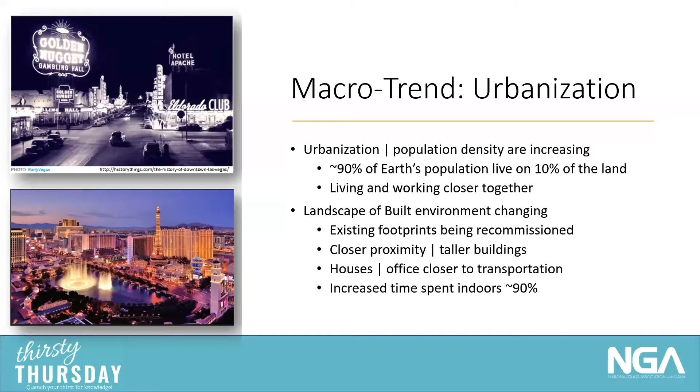And we're also spending a lot more time indoors. About 90% of our time on average is spent indoors. And because of that, we have to be concerned about the effects of noise. So the other part of it is that we see modern designs using a liberal amount of glass. And historically, that has been a weak link for noise. We have to keep that in mind as we go through this session, because we're going to come back to it at the end.

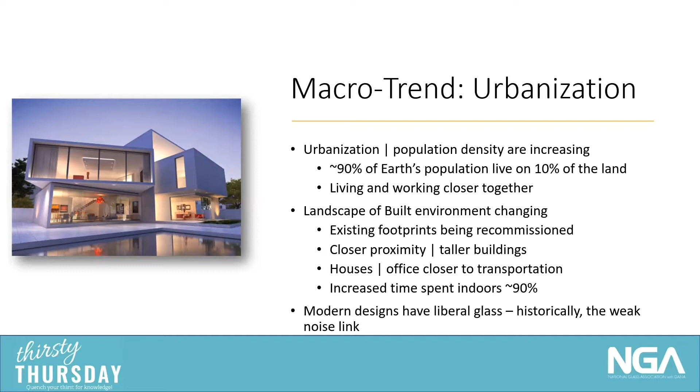So why noise? Well, the World Health Organization has designated noise as one of the top 3 pollutants in the world. It may not be seen—we might not see it on the ground littering or looking up in the sky as smog—but it's certainly there, and we can hear it. And it does disturb many facets of our life in the way of communication, comfort, and concentration.

Concentration is a big one because that has an impact on safety, job performance, and more importantly, on our individual health. The other key is the sources of noise are increasing.

And there's been proven in many documents—all you have to do is Google it—that noise has a very direct implication on students' capability to learn. And during the COVID pandemic, anybody who has had children trying to learn at home, nephews, nieces, grandkids, or even trying to work at home with different noises, you'll understand how hard that is.

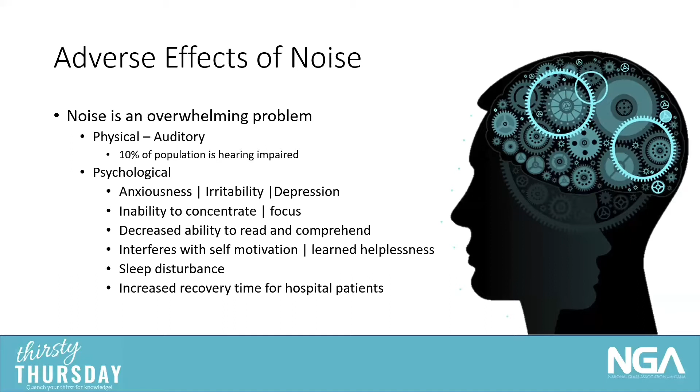So when we look at our design dilemma and we look at noise, we know that we need buildings. It's a human need to have shelter, any kind of shelter. So that is a need that we all have.

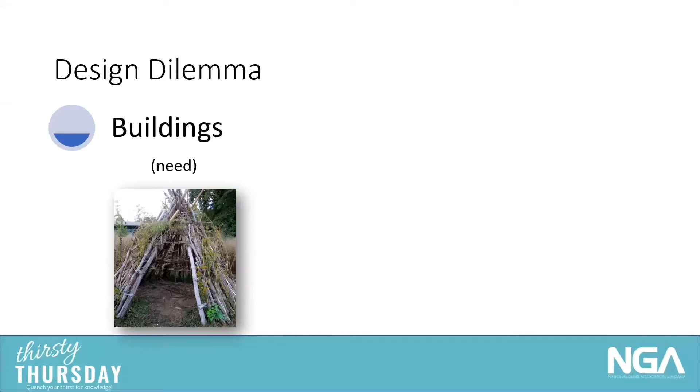We want a lot of daylight. We like to connect with the natural side of things. And all of this gets into the liberal use of glass and the willingness for us to use glass to bring natural daylighting inside for not only energy, but also for the psychological reasons.

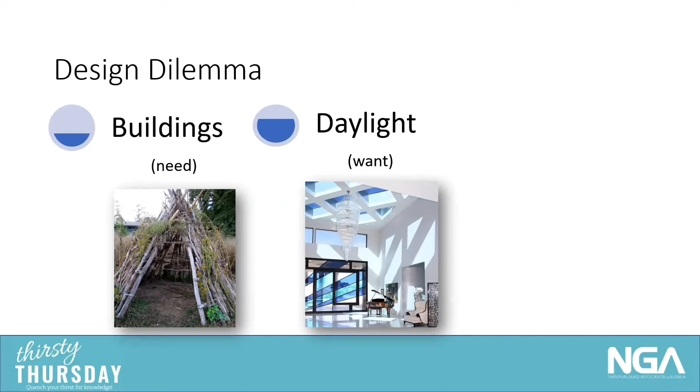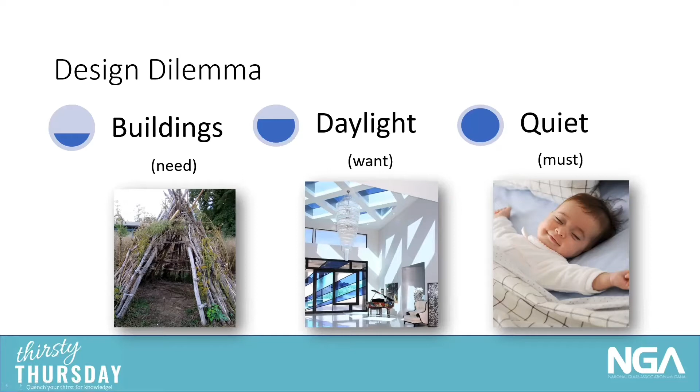But what we absolutely need is quiet. We must have some quiet for us to sleep, to turn down, to turn off, and to rejuvenate, and in some cases recharge our batteries. And so we have to find ways to combine all of this so that we can function at our highest levels. And so that's when we come to sound abatement glazing.

In the sound abatement glazing, we see that the specifications are tremendously increasing. It is driven by choice or municipal mandate. So you don't really see a noise abatement standard written in hard text in a building code.

Now, cities and other municipalities may have noise regulations, and there isn't a state in the continental United States that doesn't have some location within it that doesn't have sound control requirements. So it really is growing.

There are noise requirements in some of the health, safety, and wellness regulations. So in LEED, you can get points in well building design and things like that—they do give noise abatement points and credits.

You also have to look at the building type, the location, and the use. If it is a greenhouse that's in the middle of nowhere and it has very low occupancy, it probably doesn't have a need to have acoustical comfort inside. Although, I've not done a study to see if the plants really would grow better and produce more with certain types of noise or lower level of noise.

But the building type, the location, and the use of the building is very critical. The other key is you cannot move the building. So once the building is up, what gets built around it is secondary. And a lot of times you'll figure, oh, it's a pretty quiet area, we're okay, we don't need noise control. And think of that on a housing, a residential side, and also on a growing city.

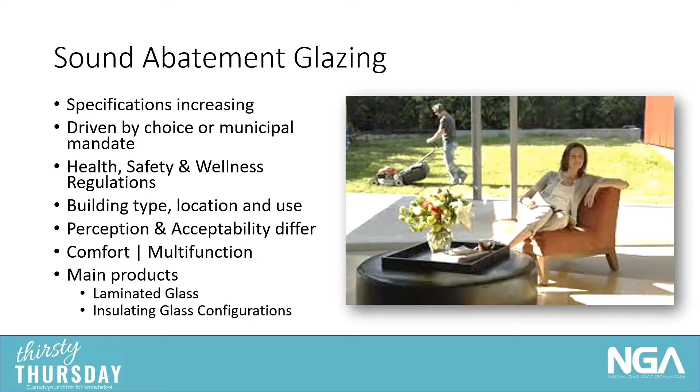The main products in sound abatement are laminated glass and insulating glass configurations. Those are the two things typically used. That doesn't mean they're the only options, but those are what we'll concentrate on here because they are the most widely used materials.

So let's get into the basics of acoustics, and I promise this won't be a physics lesson. But we do have to get into a little of this. What is sound? Sound is molecules in motion, a mechanical wave. It has to go through a medium for transmission, and that medium in most cases is air, water, or a solid object. For us talking about acoustics, it's mostly solid objects and air. You could put this in an aquarium and change those dynamics, but we're mostly talking about solid objects, which is the glass, and air.

We measure sound level by pressure, and that pressure is called a decibel, designated as a small d and a capital B. You'll sometimes see that as dBA, with a capital A at the end, meaning it is weighted for human hearing. dB and dBA, as confusing as it may be, are used very interchangeably in our industry, but note there is definitely a difference between the two.

Any vibrating object will generate an acoustic wave, and that wave will propagate through the medium, be it the air or a solid. That's how we hear. Those frequencies come through, called hertz. They vibrate our eardrum and move the little hairs in our ear, and that's how we hear.

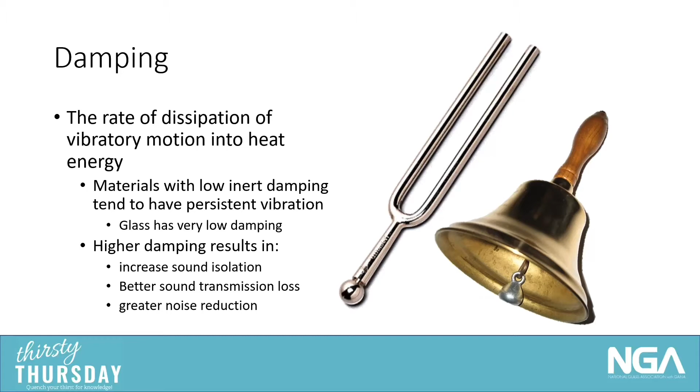So what I'd like to do now is go through the methods of test. We have these principles, but how do we test glass, or test materials, to understand the acoustic performance of them? The first thing is a product evaluation. Most construction products can be tested for acoustical performance, they just need to use a standard practice, and there are several different standard practices out there. The first one written down and documented for international use came from ASTM. It's still around today, it's ASTM E90, and we'll talk a little more about how that's done.

Typically glass and glazing is evaluated by the same method, using sensors and sound generators and everything else. You can test the glazing alone, or you can test it in a system, and you'll get two different results depending on how you test it. It's like anything else: if you're testing a component and put it together in a system, you have to make sure the whole system works together. The component can bring a lot of very natural and nice characteristics to it, however, you're always going to be governed by the weakest part of that system.

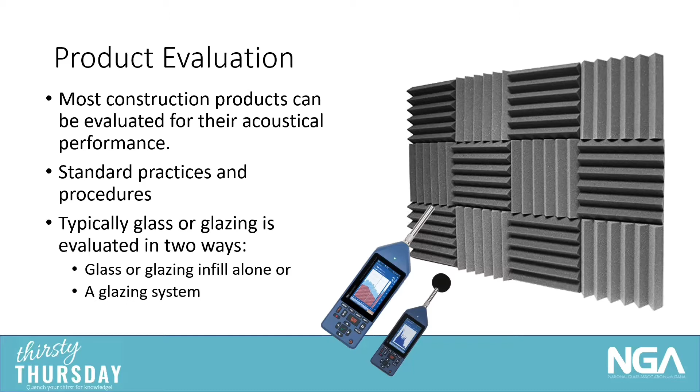So the testing itself is done in a very simple to understand way. You have a receiving room and a source room, and in the middle is where you put your sample. You start generating noise on one side and measure the sound pressure levels at the frequencies as it goes through the material you're testing. In this case it looks like a piece of glass, but it could be a window system, a car door, a concrete wall, whatever. It goes from the source room, and you measure how much sound doesn't get through that opening with your sample in it, in the receiving room. That is called the sound transmission loss number.

The methods you use, there are two different methods that use this same dual room with a demising wall structure. One is ASTM E90, which was created around the early 1960s. It's been the standard test method for laboratory measurement of airborne sound since then.

Not too long ago, ISO came out with their test method, ISO 10140, which uses the same principles but does have a few differences in that they fix their sizes to a very specific size, and they don't account for spikes and dips the same way E90 does in the calculation. But overall, the method of test is the same.

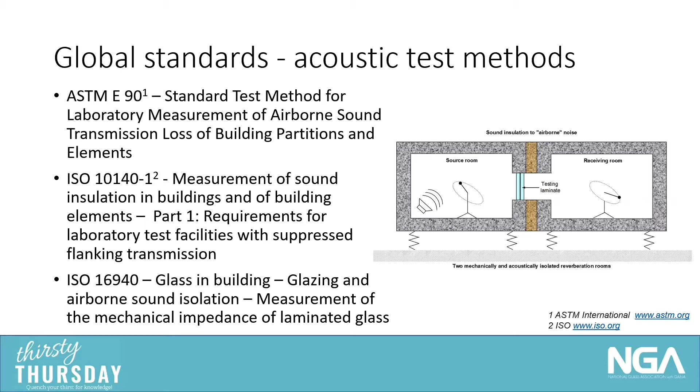There is one other test used for glazing measurement, and this is a mechanical impedance test. It is specific for laminated glass. It's done on a very small sample, and it just characterizes the components, the glass and the interlayer. But it is an important test to remember.

So it does encompass the peak human hearing. It typically runs from 80 hertz to 5000 hertz when you do the test. There are some labs that have the capability of running lower and some that run higher, but typically you don't see data much higher than 5000 to 8000 hertz from this.

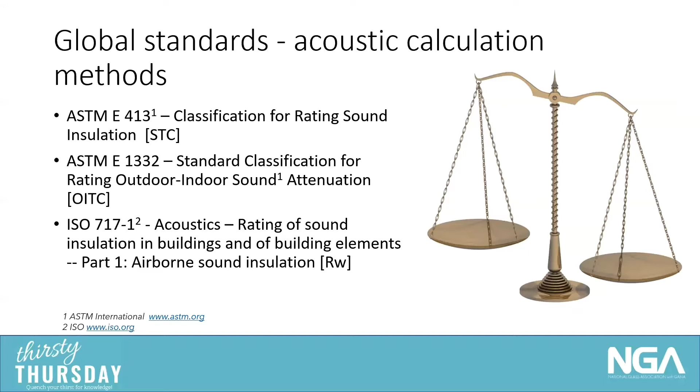Of course, the ISO system, with their test method, also has their own rating system, ISO 717. This gives you a weighted sound reduction number, abbreviated as RW. For most instances, again, they're using that same curve, just applying their rules a little bit differently. On the next slide, I'll give a bit more explanation of what happens there.

So for sound transmission loss, it is a contour fit. This is shown manually, but obviously it's done by computation. The teal or green line you can see is very rigid; that is the contour, and that shape stays fixed, it does not change at all. What you do is move that contour up and down on the graph to get the best fit for your sound transmission loss.

Maybe you can see the pointer. What you're looking at is the change in difference between this rigid line and your sound transmission loss contour line.

Once you get a fit that meets the rules - and the rules are, you can't have any points below that teal contour line that are greater than 8 decibels. So you can't fall too far below that line without a flag going up saying stop, you can't do the calculation anymore. Those bars at the bottom and that black line help show that 8 decibel rule. If those black bars tend to go up or over that horizontal bar, you know you do not have a good fit. All of those column bars have to be below the 8 decibel level.

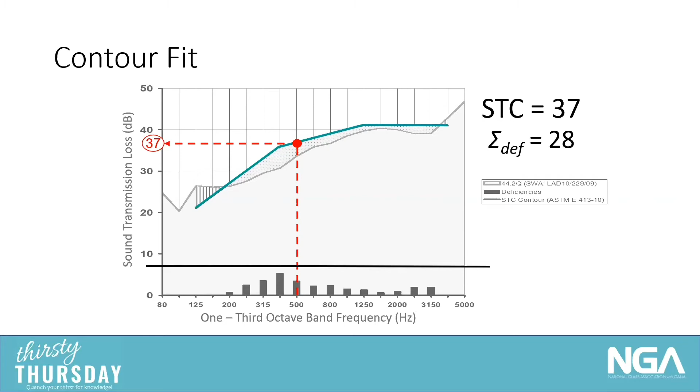The outdoor indoor transmission class, abbreviated OITC, uses the reported one-third octave band frequencies between 80 hertz and 4,000 hertz. It's used for outdoor and indoor noise rating, mostly traffic. It's not intended for environmental noises such as speech or higher frequency sounds.

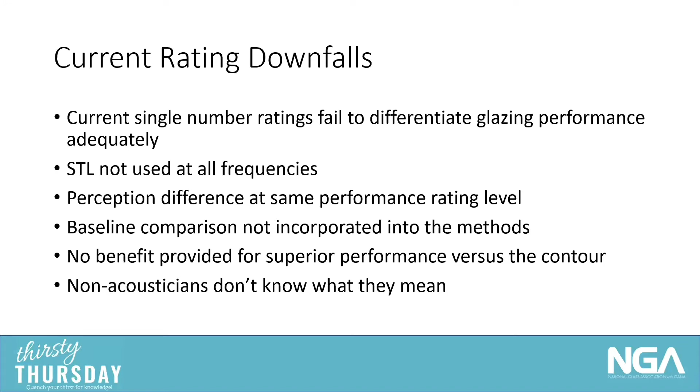There are some things that can be done to help spread knowledge and get that better understood, but it is a fairly complex mechanism.

So leaving the test methods, the key I want you to take away from that is: two rooms, stick something in the middle, blast it on one side and see how quiet it is on the other side. That's how you get your values.

But then let's go into what you can do with glass design. There are levers that you can use to get sound reduction. Glass mass is the biggest one.

So you can go to thicker glass. Thinner glass has higher sound transmission than thicker glass does. The key to remember is that the critical frequency, that frequency where the sound goes through easily, moves lower with thicker glass, not higher.

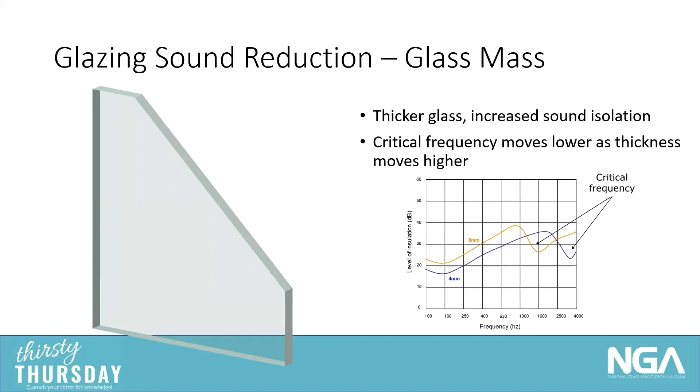So the thicker the glass, the critical frequency tends to move to the lower hertz regions. So if you're trying to block out noise happening at 1600 hertz, you don't want to use 8mm glass because that's right where the critical frequency is. You're better off using 4mm glass because you actually have more performance there. Those are some of the critical things you need to think about when using those types of glasses.

The other lever is the gap. We can change the gap. It's most effective in insulating units with a 1/2 inch or 12mm airspace or greater.

You do get to a point where the airspace is so great that you have to do other things in design if you're going over a few inches. But for the most part, somewhere between a 1/2 inch and an inch is very, very effective.

The overall single number rating is rarely enhanced with gas infill. We get this question all the time—if I put argon in there, or krypton, is it going to change my overall rating? And the answer is no. The reason is you gain some at certain frequencies and lose some at other frequencies, but the overall rating ends up not changing.

So this is another one of those instances where, if you are very specific about what you need, you would have to run a test with the amount of gas infill you need. But overall, the single number rating doesn't change when you go from air to argon to krypton. There are some gases that do make a difference, but they are very rarely used.

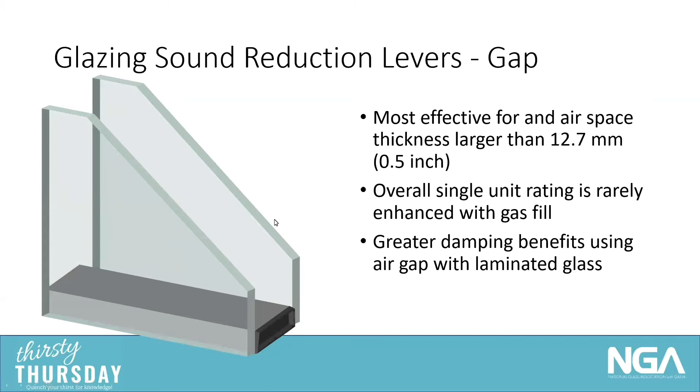And then you get greater damping benefits when you combine air gap with laminated glass. Obviously you keep making the glass thicker. And then you have our last lever, which is the interlayer.

What the interlayer does is allow for damping. It can be used in combination with airspace, thicker glass, double laminated—all of those types of things. It contributes to the system by giving you that hand on the tuning fork, or grabbing the bell, and just damping that sound so it doesn't come through at the same intensity. That's what the interlayers do.

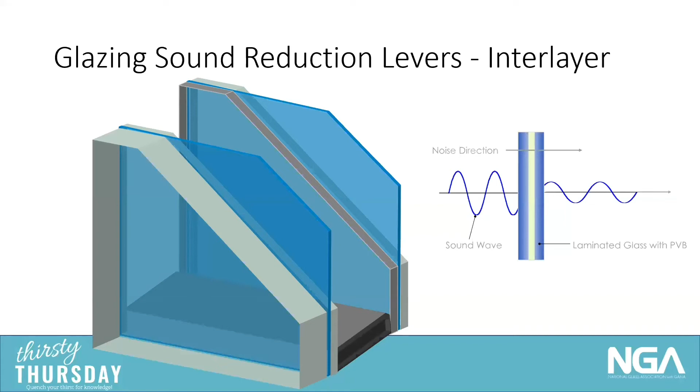The most typical configurations for laminated glass in acoustics: you can start with a single unit laminated glass, which is two or more pieces of glass with an interlayer in between. You can go up to a laminated insulating unit, a double laminated insulating unit, triple—where one or all three constructions of the glass layers is laminated—and even into multi-ply laminated for high-end security or other controls. Those are the typical laminated glass configurations utilized for acoustics.

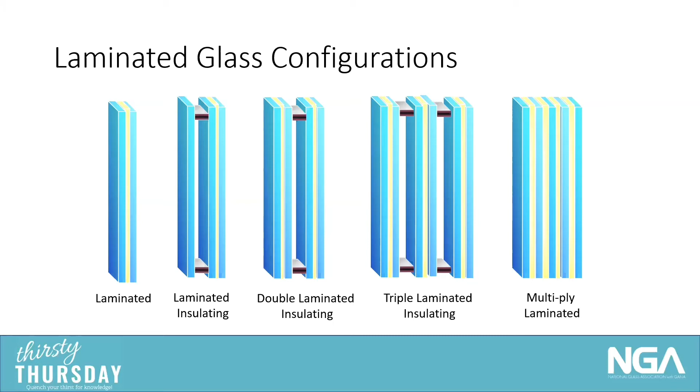The interlayers themselves have undergone an incredible evolution since we first started testing for acoustics in the early 1960s. I liken it to the telephone. We went from the old rotary phone, which was conventional PVB. It worked really well, you could accomplish what you needed to do. It still works well today—if you find one of these old phones and plug it in, you can still make phone calls. You might not be able to dial out, but you can certainly accept calls.

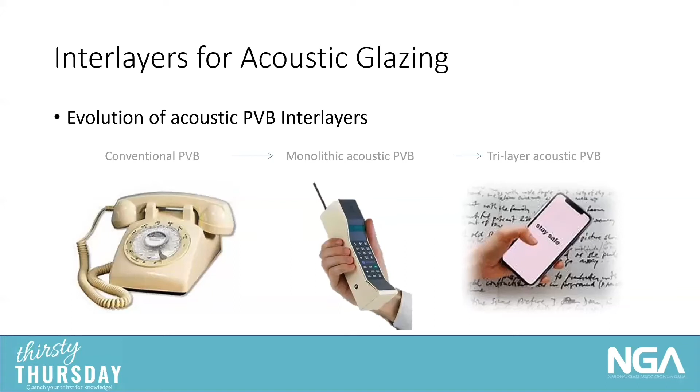Then it moved to a more engineered product, a monolithic acoustic PVB, engineered to have greater sound damping. I call that one of the earlier cell phones, the big clunky thing. It had some issues from a processing standpoint, a little more difficult and not all that production friendly. Then came the big evolution to tri-layer acoustic PVB interlayers, or multi-component interlayers—what we'd call our cell phones today, really highly engineered, highly functional, and refined.

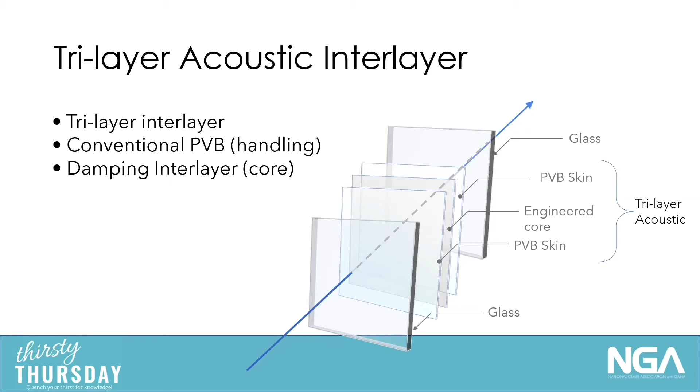So what are these tri-layer acoustic interlayers? They tend to still have two pieces of glass, with differing materials in between. In the case of the one we make, it's PVB skins—your conventional PVB skin—with a highly engineered acoustic damping core. Most people don't know that your standard 30 thousandths or .030 PVB is the thickness of a credit card, and this material is made in that same thickness—not thicker, actually the same thickness. The core is the damping material, and it creates a much more efficient sound damping characteristic.

You can see that by looking at the evolution of interlayers in sound transmission loss numbers. The bottom black curve is 6mm monolithic glass, with our critical frequency right around 2500 hertz. Then if you look at conventional PVB interlayer, that's the bright green one—we had some advancement with the monolithic PVB interlayer. But the tri-layer PVB material really did take care of that critical frequency dip, got rid of it completely, and really brought up the amount of performance.

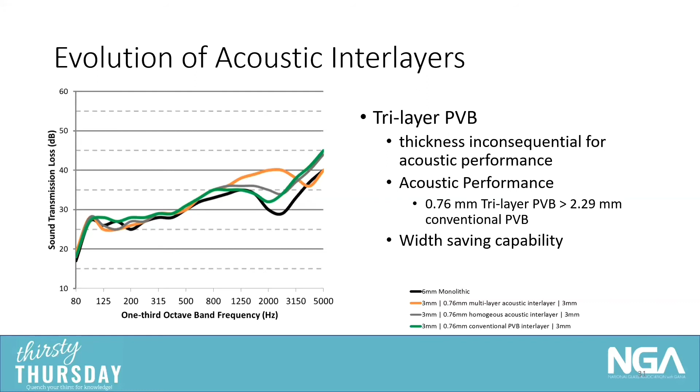A couple things to remember: a change in frequency, in a critical frequency or any frequency, of 3 decibel units is barely perceptible to the human ear. A change of 5 decibel units—from one solid line up to the dashed line—is very perceptible, a noticeable change. A change of 10 decibel units or more is actually a halving or doubling of the sound, depending on direction. So in this case, the tri-layer acoustic interlayers can cut the sound by about 50%, or cut it in half, in the critical frequency range. That's pretty good performance.

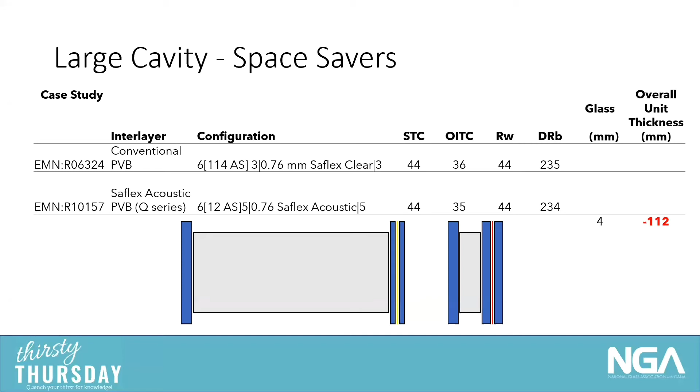What does that mean? Who cares, right? It allows you to design systems in a much thinner overall capacity and get incredible acoustical performance out of it. We looked for an STC—both units have an STC of 44, and we tried to find the closest OITC within that unit, within 1 unit. You can see that the material using conventional PVB, the overall thickness is quite wide. By going to the acoustic interlayer, we actually save 112 millimeters of space, just by slight tweaking of the glass and using the acoustic interlayer. So you really can make much thinner units with the same acoustic performance—they are real space savers.

Laminated glass for acoustic control is an incredible trend we're seeing. It's been used in windows since the 1960s. Most interlayers tend to have a high inherent damping capability—some are better than others, some are engineered to be superior, others just have a natural capability. Laminates add flexibility to tweak performance. One of the beautiful things on the acoustical side is we have the ability to change glass thicknesses, change air gaps, change symmetry or asymmetry—all of that can be tweaked to give different performance attributes.

Remember that the critical frequency, the transmission loss, is dominated by the amount of damping. So if you have a big dip right there, you can put damping in to help alleviate that critical frequency. You can increase your overall performance without going to thicker glass and thicker units by putting laminated glass in there for acoustical control, and you can have even higher performance with the tri-layer materials.

One of the things we tell people is that it's a polymer, and all polymers tend to be sensitive to temperature. Typically, and we recommend this for any type of laminated glass, the laminated glass should be toward the interior for the most consistent performance, because it can vary a little bit by temperature.

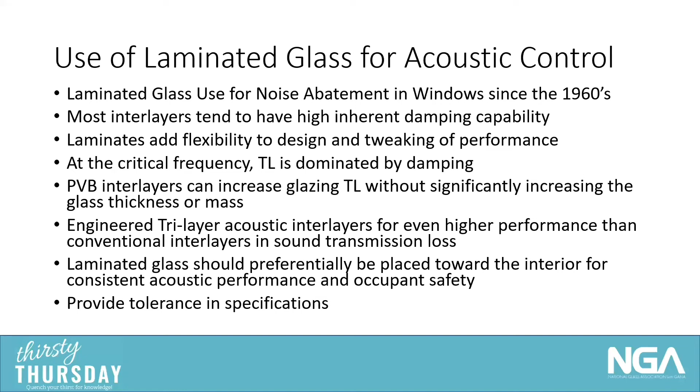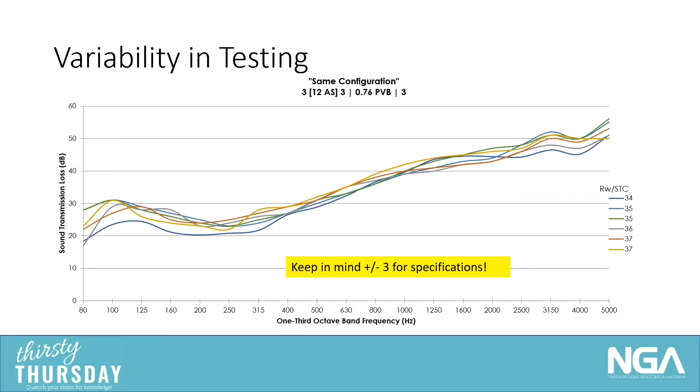What are some design considerations for glazing? What influences acoustics and what doesn't? Adequate damping and airspace of a 1/2 inch or more is recommended. Laminated glass with non-rigid interlayers. Rigid interlayers, if used by themselves, are not very good for acoustics. They are very similar to monolithic glass versus some of the conventional or acoustically engineered materials. Thick glass should be used if you need very low frequency reduction, but remember our critical frequency also travels down, so you want to pay attention to that.

Using asymmetrical insulating glass constructions is better - symmetrical insulating glass constructions tend to be poorer in performance than some other constructions because the vibration is at the same frequency. Acoustic tri-layer interlayers give you some of the best performance versus monolithic materials. The temperature of the glazing can have an effect, and certainly the framing type.

Now, to this point, we haven't really talked about the framing type, but I'll give you a little tidbit and rule of thumb: if air can get through, well then sound can get through. So the frame type, the air tightness of the frame, and all of that have a big influence. Obviously, fixed windows will perform better than typically operational windows.

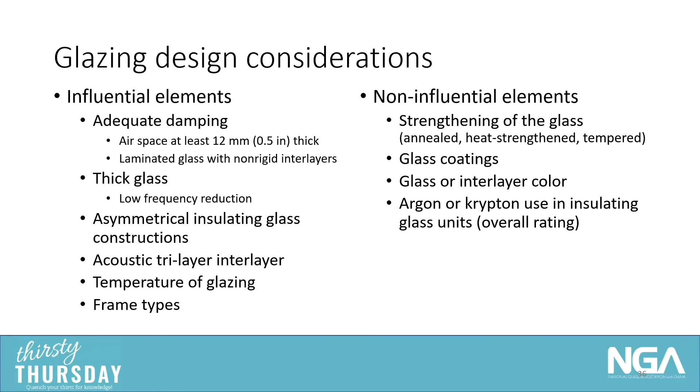Some factors in design: again, concern yourself with the use of the building. If it is going to be a school that's being built right next to a train track, you might want to have acoustical glazing in the school. If it is a greenhouse in the middle of a field that doesn't have anybody going in it except once or twice a day, you may not need it. A hotel sitting right on a highway, yes, those types of things.

Understand the type and origin of the noise. That is very critical. If you have low rumbling noise, you're going to want to concentrate on a higher OITC number and look at where your frequency is coming from. If you have higher pitch noise, you're going to want to look more at stuff above 1,000 hertz and what's going on there. Also, how frequent your noise is, because you could have a lot of noise when there's nobody in the building and it be quiet during the day.

Your windows and your glass cannot make up for poor wall construction. So if the sound is stopped going through the windows but comes right through the wall, your occupant will not be very happy. There's not much we can do about it, but those products should be closely matched in order to get the optimum performance out of them.

Again, the type of window or system, fixed versus operable, makes a big difference. The window dimensions - again, very large windows and very small windows - we have to concern ourselves with edge effects and vibration and damping. In some cases, very large windows can give you more of a whoomp, whoomp, whoomp sound if they get moving and vibrating, where little windows can sometimes give you a hissing sound because they're so stiff and the air is like whistling through.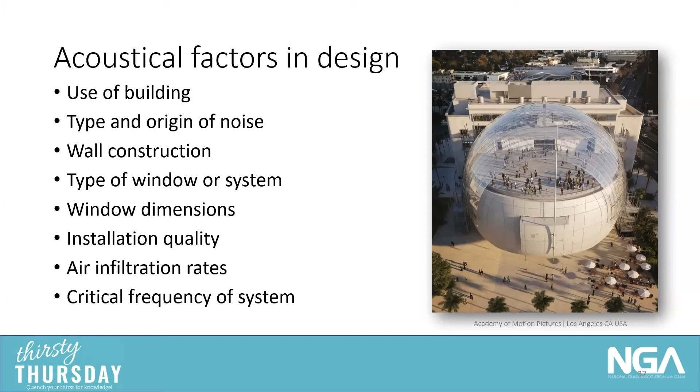Installation quality matters because if air can get through, sound can get through, so we look at air infiltration rates and the critical frequency of the entire system. You can't rely on just one component. You can't take a poor frame and put high performing glass in and expect it to perform any better than that poor frame, and vice versa. You can't take a super engineered acoustically sound frame and put in low rated glass and expect that frame to make the difference. It's going to go to the lowest common denominator.

Some school systems and educational facilities use it to help with learning and the environment, bringing in daylighting, the natural aspects, the liberal use of glass, and the multifunctionality of incorporating color with natural daylight.

Some hotels and spas look for natural beauty, serenity, and exotic looks where you can incorporate color, but you want to make sure you have the sound and comfort there too.

Hospitals use it in many different aspects, from the facades to interior applications like divider walls, for health and cleanliness. Glass, as we all know, is very easy to clean.

All of that incorporates the use of acoustic glazing, especially with HIPAA laws and similar regulations. Transferring sound from one room to another, or from outside to inside, is critically important.

Offices, as we discussed, deal with production, concentration, and focus, so offices are incorporating laminated glass in their facades and interior partitions for sound comfort, while also bringing daylighting further into the building.

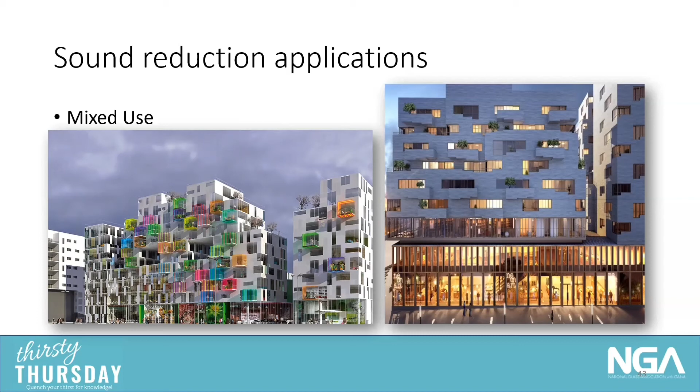Those are applications, and then there's mixed use. A lot of times you have materials where you have stores below and residences above, and that's a time-of-day type thing. It might be very loud during the day, and in some cases louder at night, while people are trying to live and run their lives on the upper floors. So those are also applications for acoustic glazing.

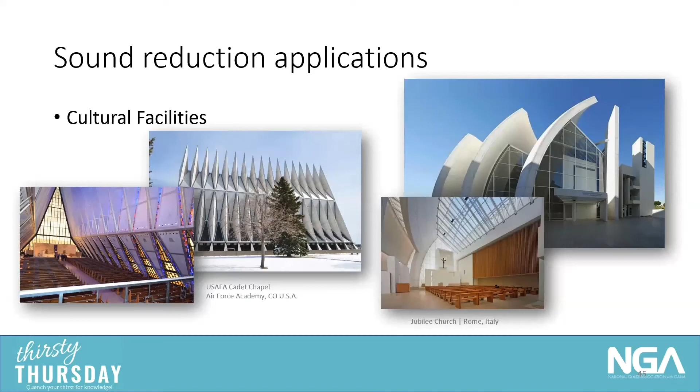Museums tend to be quiet and serene, and they want you to focus on the art they're displaying, not be distracted by outside noise or a poker run with motorcycles going by. That's an application, along with cultural facilities, where thought, prayer, concentration, and relaxation are also very critical.

We also see sound reduction applications in government buildings, which have multifunctional needs for wayfinding and security. Incorporating laminated glass for acoustics is a natural fit for things like that.

Sports arenas too, the facade and the VIP boxes, which I've never understood—if you're going to a sporting event, maybe I'm just jealous, but you don't want to hear what's going on outside. So I'm confused about that one, but we do see a lot of those VIP booths glazed with acoustic glazing. I'm often told the reason is those booths are used for non-sporting events, other meetings and things like that. Obviously, I understand why they put that in.

Concert halls too. Nobody wants to go to a concert hall, especially an opera or a show, and be distracted by outside noise and what's going on.

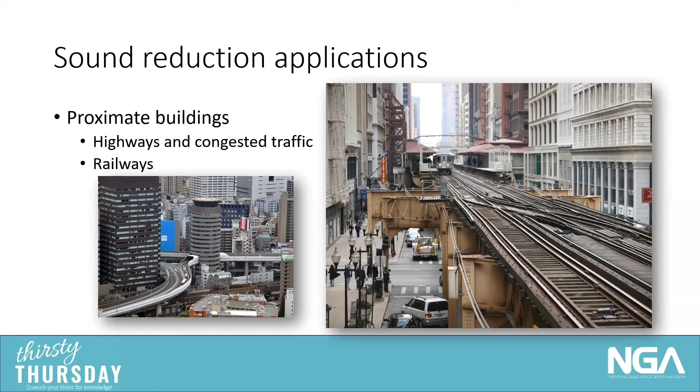The other part is you build your building and you don't know what's going to get built around it. A lot of times we just put in a product that meets code, that qualifies us for everything, and then voila, a world gets built around us, and the building occupants aren't happy, the building isn't comfortable. So we try to encourage people to think further ahead and put it in at the original building, anticipating growth and the environment and people living around the building, because you cannot move the building, unlike a car you can drive down the street. So the last thing I wanted to hit on is the link.

Remember at the very beginning I said we have liberal use of glass, and glass tends to be the weak link, or traditionally has been the weak link. Well, let's just look at a tidbit of information from the industry. Is it really the weak link?

So we have a concrete wall, and that concrete wall is 4 inches thick. According to the National Concrete Masonry Association, that gives you an STC of 40 if it's hollow and 48 if it's solid. Pretty impressive.

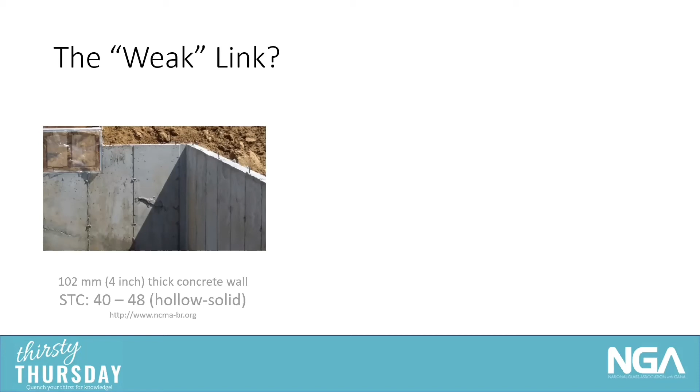Well, remember, we're looking at the glass being the weak link. That's 4 inches thick concrete. Laminated glass with acoustic interlayer at 5/8 of an inch gives you an STC of 40. A double laminated insulated glass at 1.5 inches thick gives you an STC of 48.

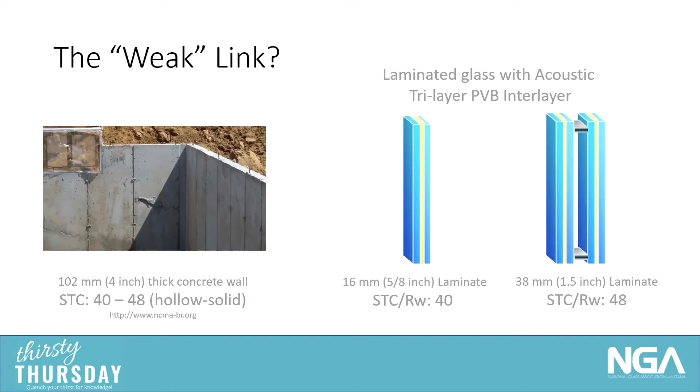I think it's time our industry goes through some paradigm shifts. Glass as a weak link is no longer an excuse not to use glass in a building. Use acoustic glazing and you can get the performance you need. You don't need to have large cavities to have acoustic performance. You can standardize the cavities as long as the configuration you put together is correct. You don't need custom frames because the glass can fit in more traditional frames, so common systems can be used.

Thick interlayers don't necessarily need to be used anymore. You can use standard offerings. One thing I didn't mention in this presentation is that a 030 acoustic tri-layer interlayer material will give you better performance than 090 conventional material. So you don't even have to go through the thicker interlayers.

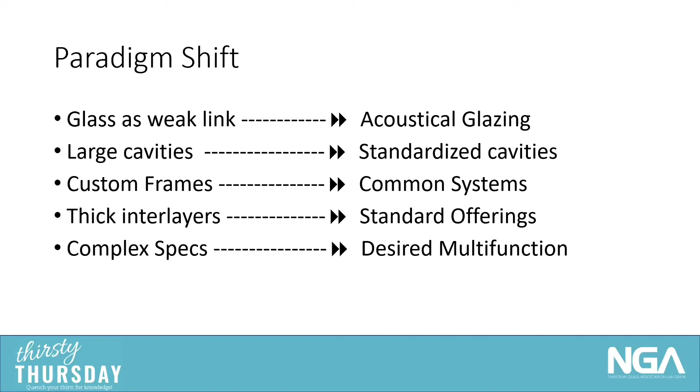And then for complex specifications, if you desire multifunction, you can get that performance today by using these products. So in summary, acoustic damping is what you're looking for. You enhance comfort versus non-laminated glazings. It's used effectively in a single unit all the way up through a triple laminated or multi-ply system.

The tri-layer acoustic interlayer is an engineered product specifically for sound control. It does bring multifunction to the products. It can be placed in one or more lights, and you're able to design it into new and even existing structures, and retrofit with it. So you can enhance your spaces through the use of acoustic glazing.

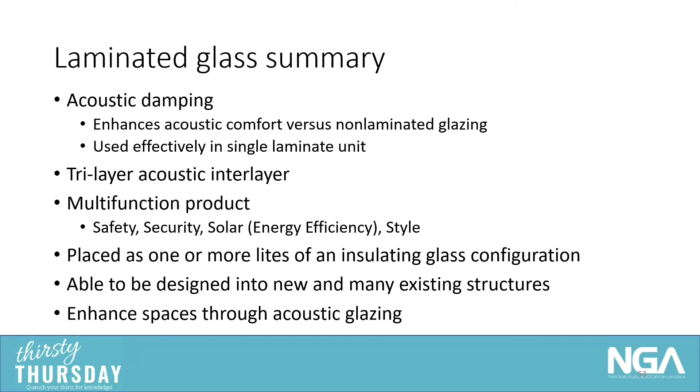The benefits for architects are: you increase the noise damping without increased glass thickness and weight. You have the ability to increase daylight openings without compromising or sacrificing acoustic comfort in your facilities. You can provide acoustic comfort when buildings go up in less than ideal locations, because the land and real estate just isn't available in an ideal location.

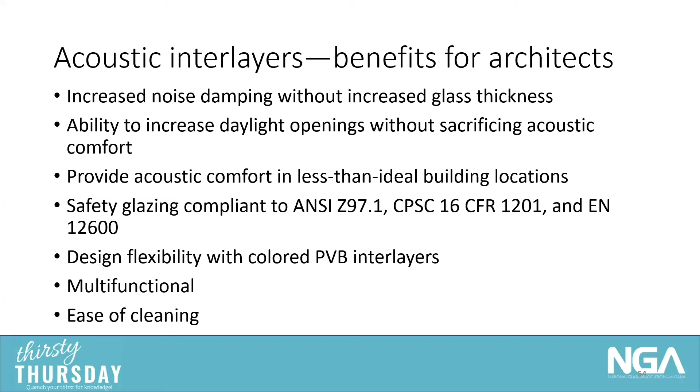These materials are safety compliant to ANSI, CPSC, and European norms. You have a lot of design flexibility because they can be combined with colored interlayers, colored glass, coatings, patterns, all of that kind of stuff. So you really do have the multifunctional aspect of it, and you also have the ease of cleaning, which is a nice, easy wipe down and very important in this day and age to be able to clean surfaces that are non-porous. So that is the end of it.